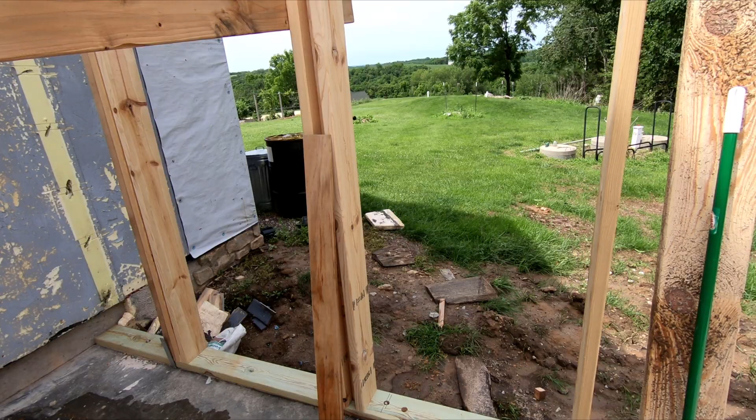Today I'm going to try to get the back wall stood up on our breezeway addition. Whether I can do it or not remains to be seen, but I'm going to give it a shot. It's getting a little late. We had a big storm last night, real high winds and 2.5 inches of rain. So everything is still drying out a little bit.

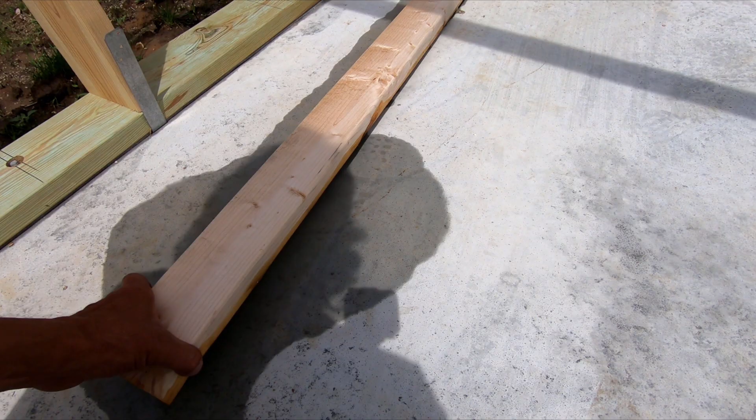So I can't walk out there, that's all clay. And it just sticks to the bottom of your shoes. So I would just make a huge mess if I even step out there for a little bit. I did before, and I had so much mud on my boots that I had to go out and wipe it off on the grass, and just real nasty. So I gotta stay within here, and we'll see if I can get it done.

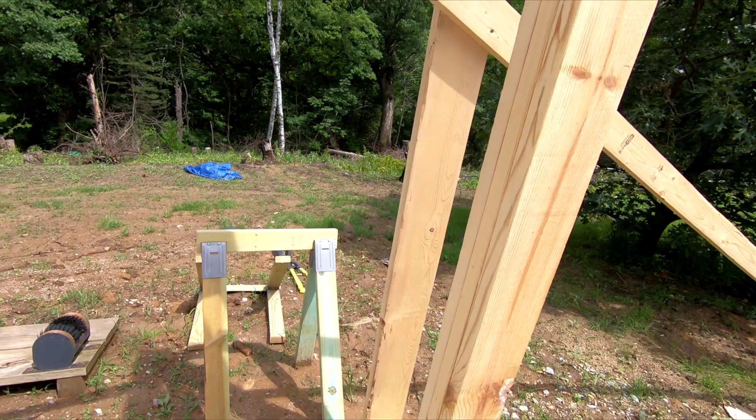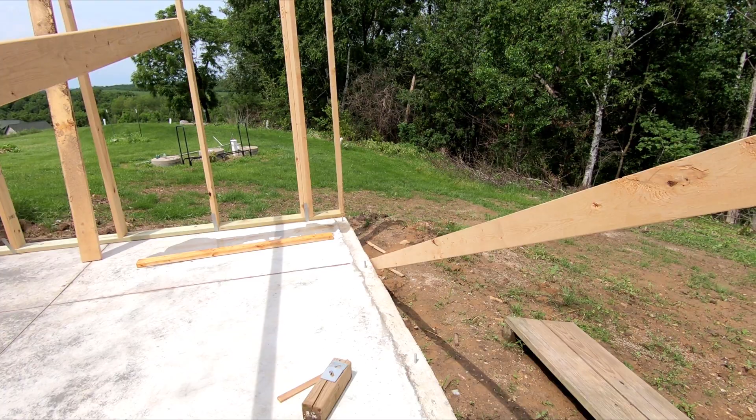The first thing I need to do is get the California corners in, which is just a stud going sideways like this. That's what this will attach to, one on either side. And I measured from the outside here to the outside on there, and it was 3/16 shy of 16 feet, which is pretty damn good. That wall isn't even bolted down, so

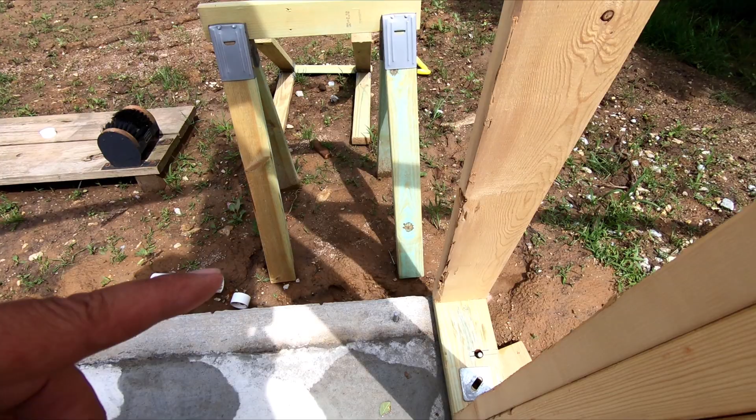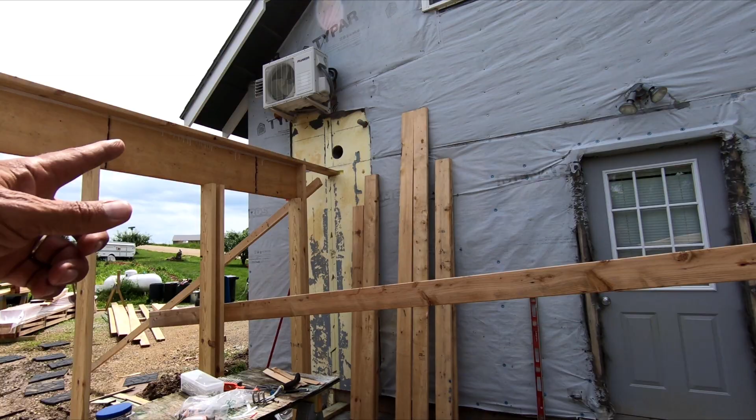I'll have to get the exact width of these boards and figure out my sole plate length and cut the sole plate, cut the top plate, and I believe there is 11 studs here, but I have that all written down across the street in the machine shed where I will need to go right now to get the studs cut.

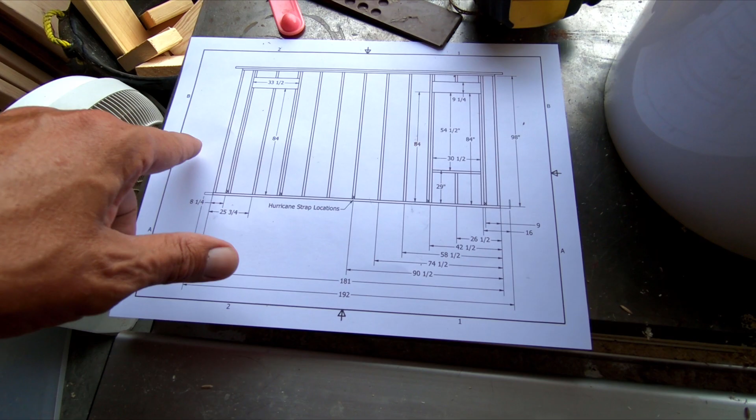Okay, here's my drawing, which I made from the 3D design of the house and the breezeway addition. I should have put a cut list on there, but I'll count them up. I believe there's 11 of them. I got a dozen boards last night. This was not on the order when we ordered our wood. We had a lot of problems with the Menards website. And also, I forgot to add a few things, so just kind of a little catastrophe there.

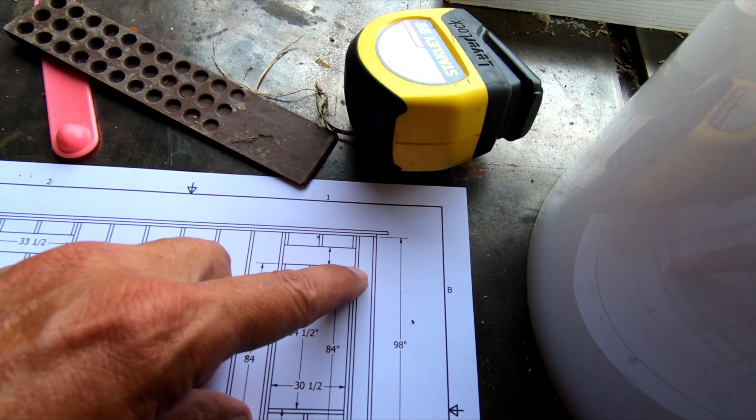When I went there last night to pick this stuff up, it was raining like crazy. I got this and that sheet of 1-inch foam. That's for the inside of these headers. What they are is a header with foam inside, and it's a 2x10, then 2 pieces of foam, and then another 2x10 to fill in the thickness of a 2x6 wall.

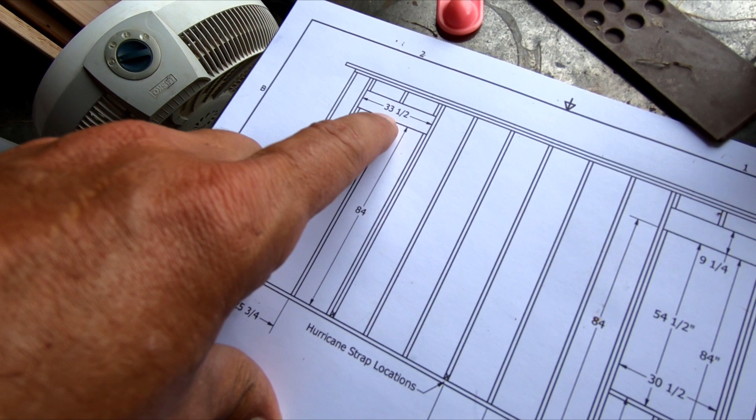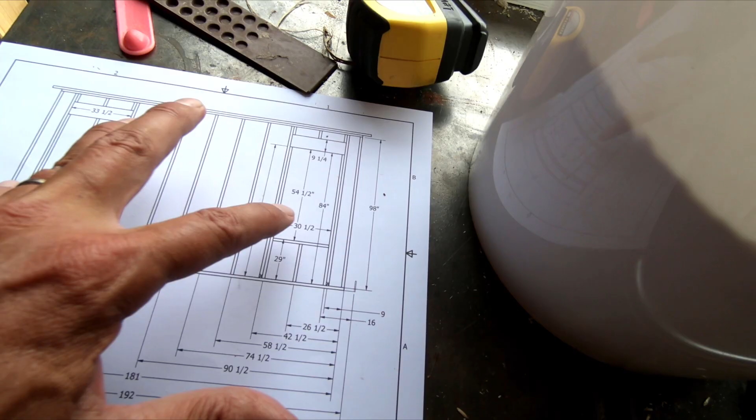So I need to get these all cut to length. Oh, what I was getting at was we don't have these 2x10s either. I could have got them last night while I was in town, and I thought they were here in the pile, and they're not. So I'm going to have to leave these out while I build the wall, which is no big deal. I can put all this filler stuff in tomorrow and just get the wall itself in. So I'm going to get these cut to length, and then I'll go back over there and cut the sole plate and header. I cut them with a circular saw and start assembling.

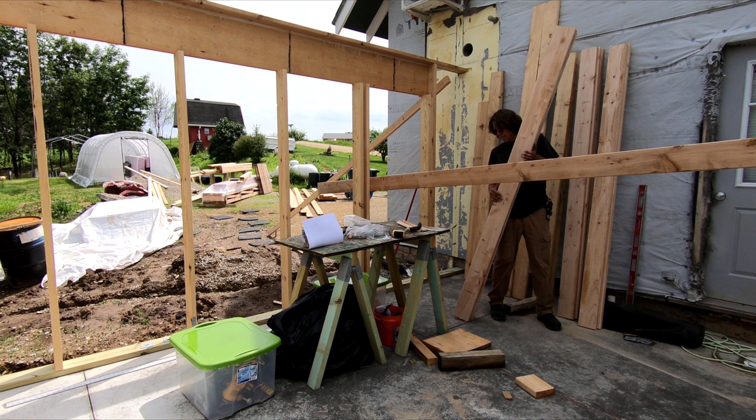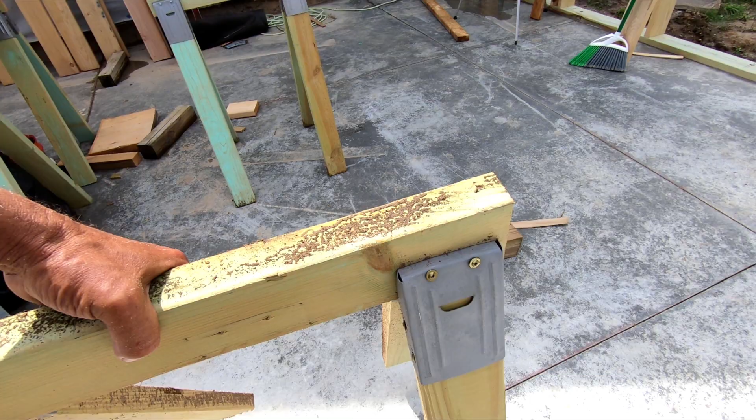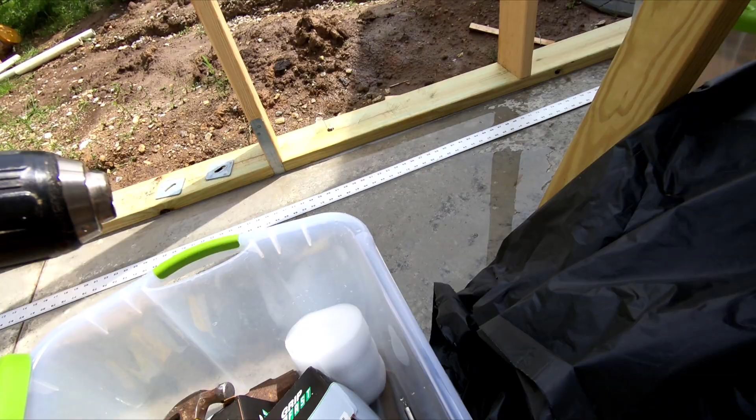...so strong last night that it blew this one way the hell down there. This one flipped out, but it wasn't laying in the mud like that one was. So now I need to get my pocket screw stuff. Pocket screw kit and driver, screw, drill, and driver.

First thing I need to do is pocket screw the California corners and get them screwed into place. Then I will pocket screw all 11 of these. Then I got to lay out the sole plate and the top plate, and I need to loosen up that bolt and adjust this wall a little bit so that it's spaced the right width. Then I can start laying everything out on the floor.

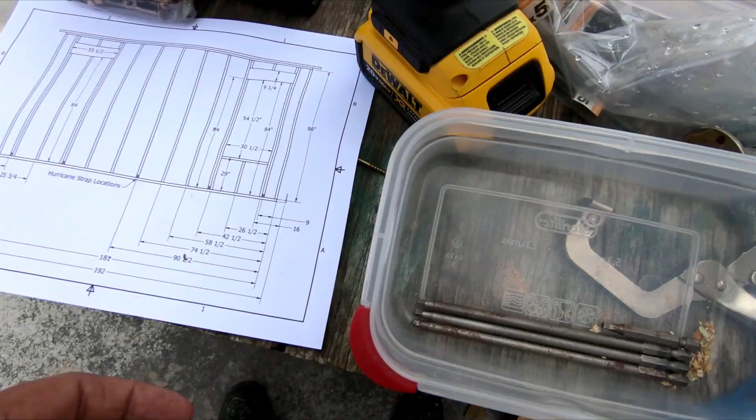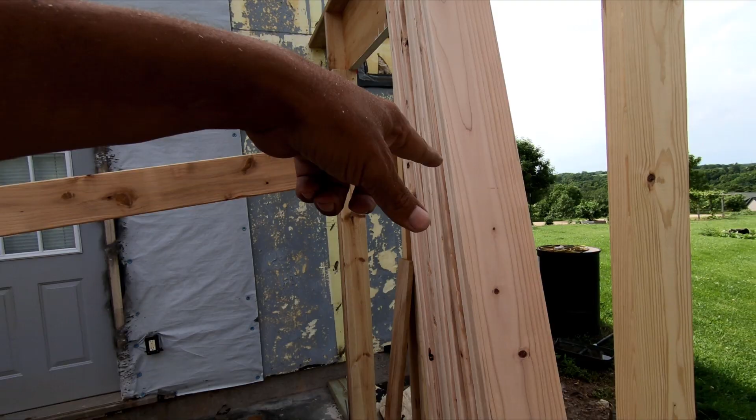So I was drilling the pocket screws on that first board, and then I thought to myself, I don't need any pocket screws on any of the stuff I'm putting in today, except for the bottoms of these California corner ones, which I'll use this one, and I'll do another one for the California corners. Then the rest of these just get screwed right through the top plate and up from the bottom plate, just like a normal wall. The reason these were pocket screwed is because I can't come down from the top plate.

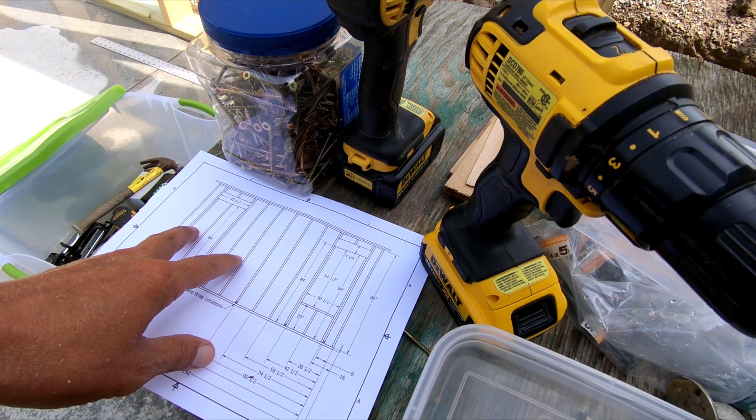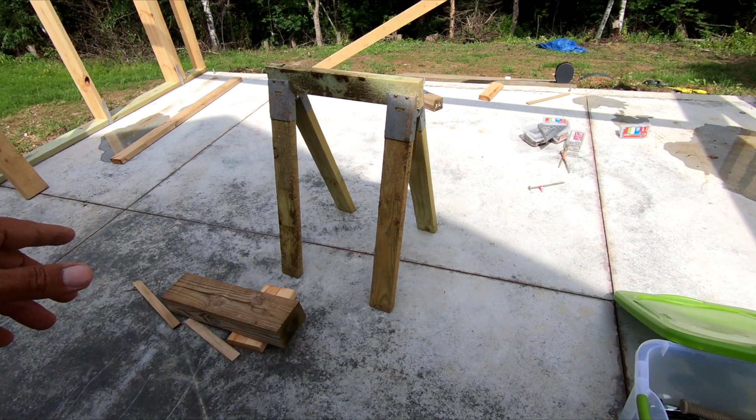I'm into this big header right here. And these also get little hurricane ties at the tops of these as well a little bit later. But that makes things a lot easier. So now I'm going to go get this bottom and top plate, set it on horses, and get that cut. Well, first I'm going to do them corners. Then I'll get that top and bottom plate, get them cut, get them laid out on the horses, and I should be off to the races.

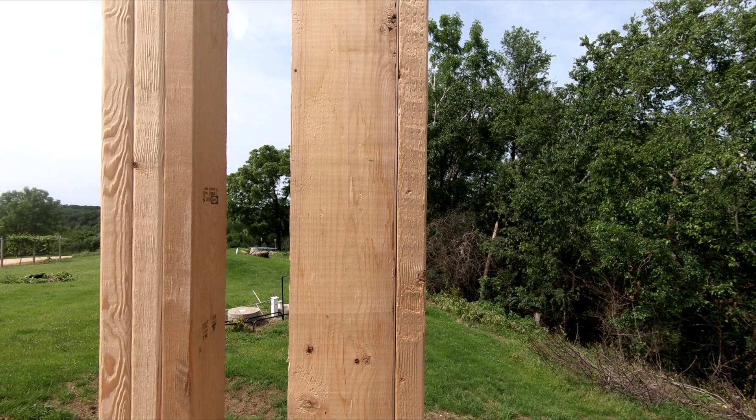All right, now to get the corners together, what I'm doing is yanking them together with the clamp. Get this semi-crappy wood. I go pound that from the other side a little bit. I can't go on the dirt there because it is really greasy. And I don't want to mess it up in here.

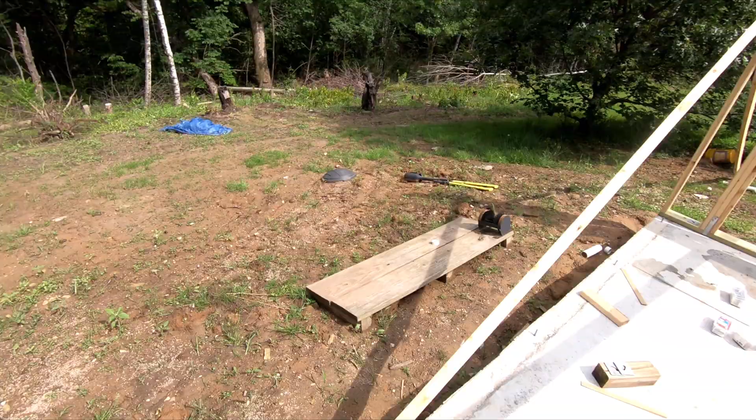Trying to pound left-handed. I'm not real good at it. Okay, now that's nice and flush. So what I'm going to do is fire a screw in there, right where the clamp is. Then move up. Now this one's going to be a good deal easier.

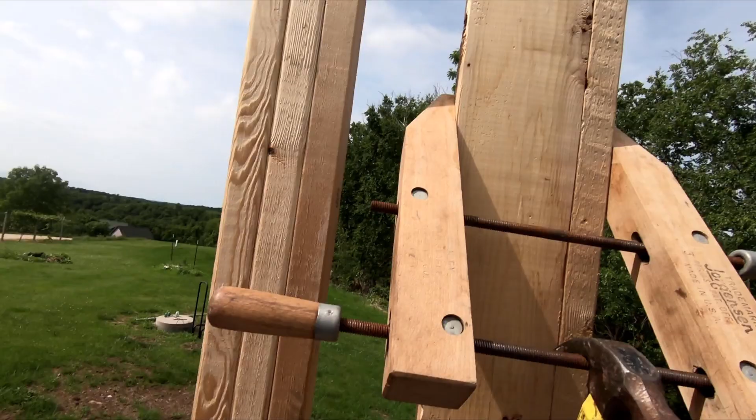Now I got to go get the ladder for that upper one. I already have several screws in there, but I'm going to throw some more in there and then go grab the ladder.

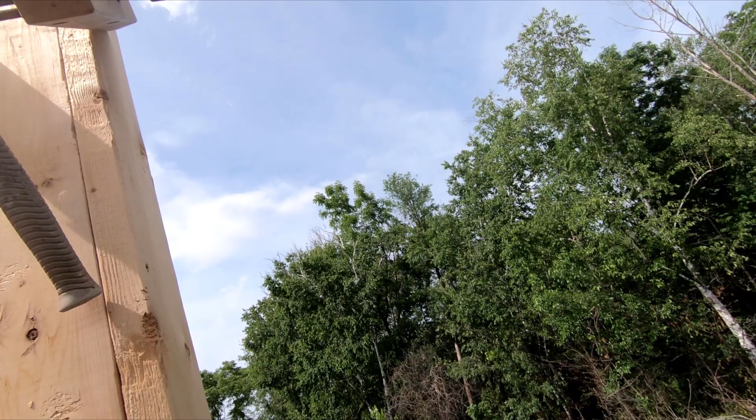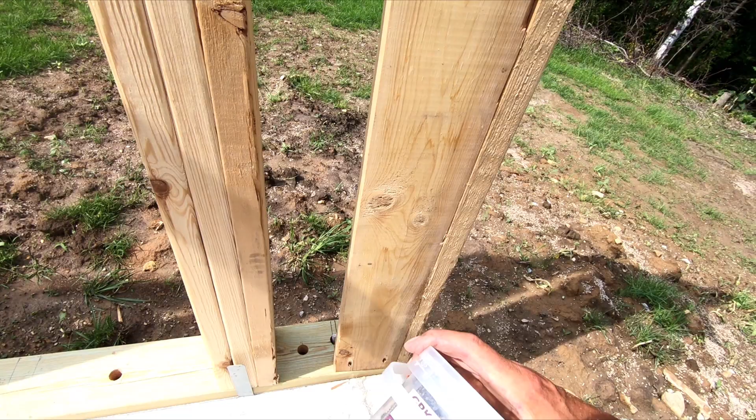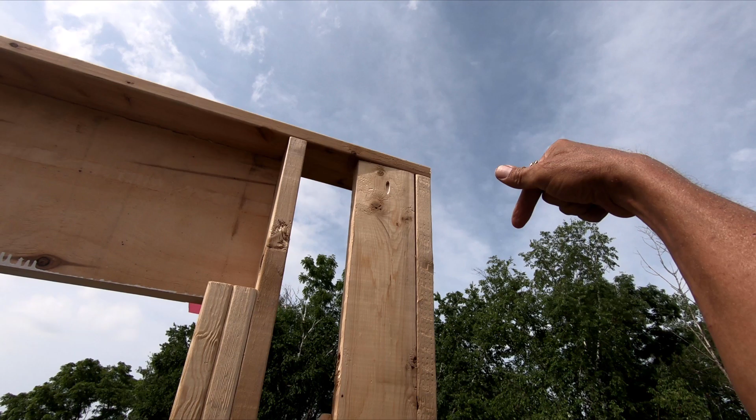That's why I'm using these GRK, the big GRKs. Is that what that is? Yeah, GRK up from the bottom as well, because they're treated lumber approved. Going down from the top, I can use regular construction screws as well. So I'll put like 3 more in from the side and then put a couple down from the top. I'll use a clamp to twist that board straight and then screw it down. I use these clamps for just about everything. Let me go get the ladder.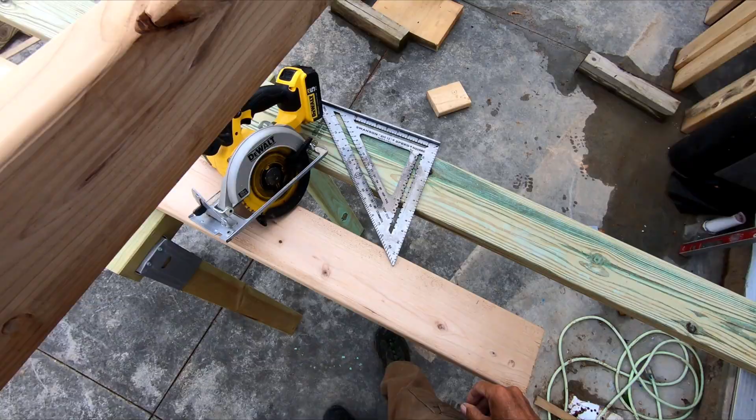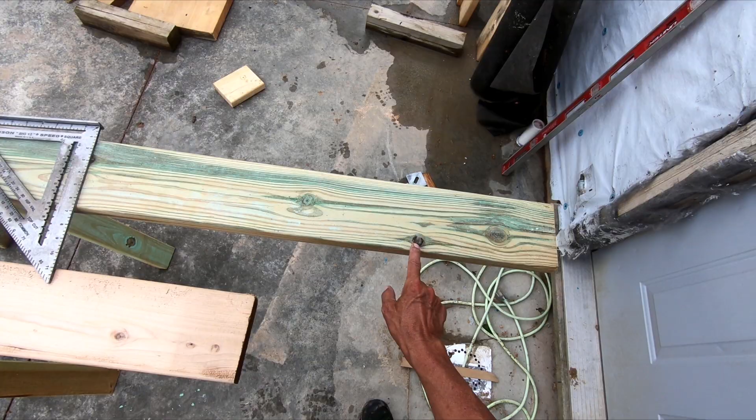Okay, if you've been following along, these are 20-foot boards. I got 3 20-foot sills, and when I got here I picked out the 2 best for the long walls. This is a 16-foot wall, so I got 4 feet that I can play with. It has some checking at the far end, so this crack here and a knot, I'll go right to this side of that stuff.

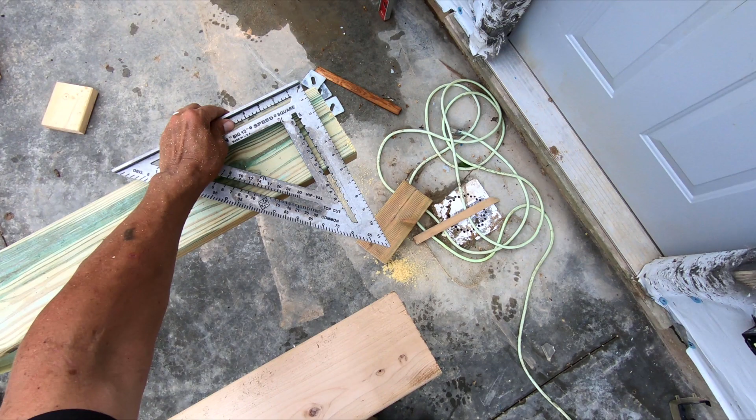Then on this one, it has a nasty crook. It goes like that at the far end. So I'm going to take this one off as close to the end as I can. I'll go right here. Now, they need to be cut off at 181 inches. Okay.

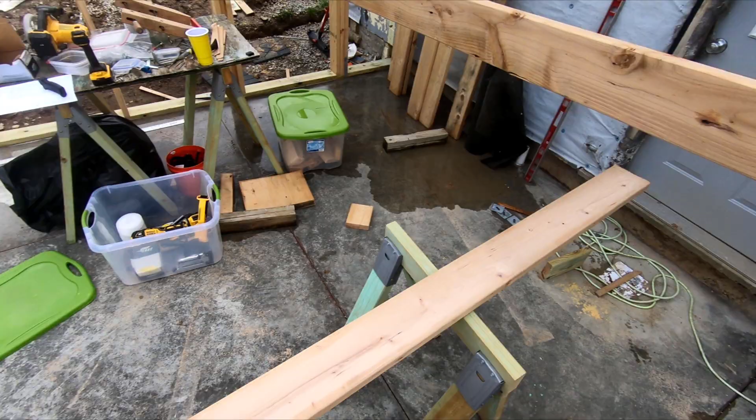Don't know if I'll be able to do this or not. Nope. I'll have to use my other square. This one's too big. This is really a pain in the butt, ducking around these cross braces to get around. Soon they'll be gone.

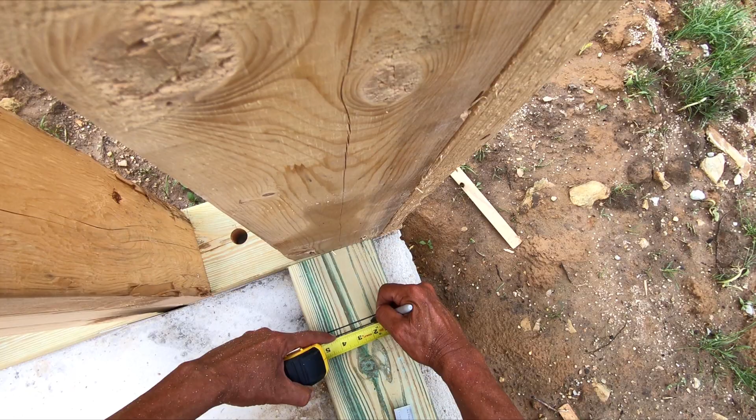Okay, so all I'm doing here is marking the actual location of the studs, like thus. Oh, gee. Now I measure from the outside here, which I'm going to call 1.5, so I'll go 1 3/4, and that will be the center of where I drill for this. So I just got to work my way. Oh, it is so hot and humid out here. It's just insane.

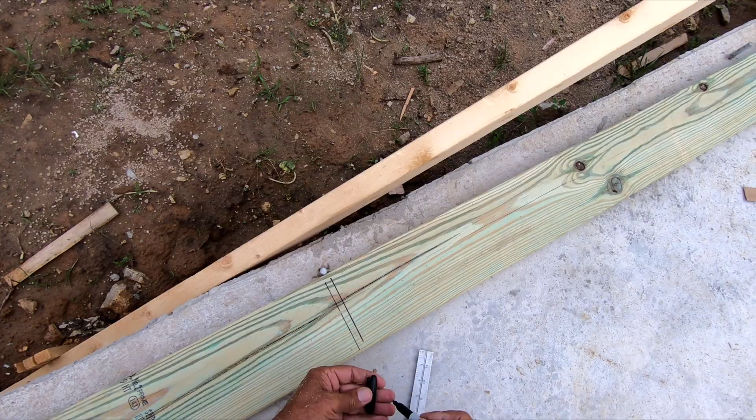So again, go from outside of the stud, make 2 lines, and then this is in the way, but I think I can get it. Got 1 3/4, so we're going to go 2 inches in, and that will be the center. Okay, just a couple more to do, and then I'll put it up on the horses and drill these holes. Then I got to lay out the studs and lay out where the actual anchor bolts will be drilled in, like on these. Alright, let me get this done.

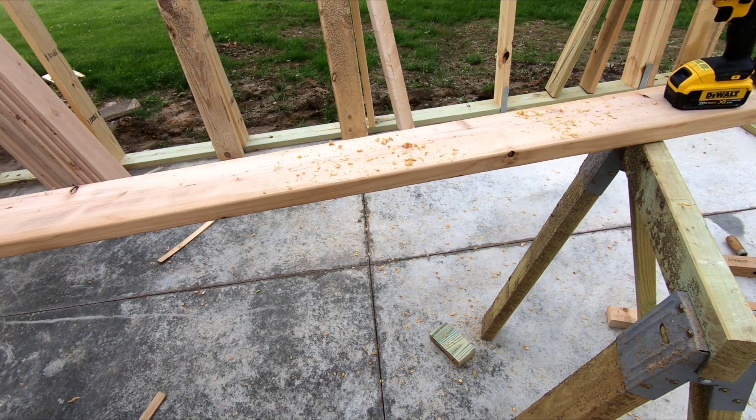Okay, the sill plate fits real well. Now I need to pop it out of there, which is not so easy. Get it up on the horses and most likely have to clamp these 2 boards together. Do all the layout, and that's where I'm going to end it today. It's getting pretty late and I got to jump in the shower and head to town to get the boards that I need. So let me get this up here, get it laid out, and then I'm out of here.

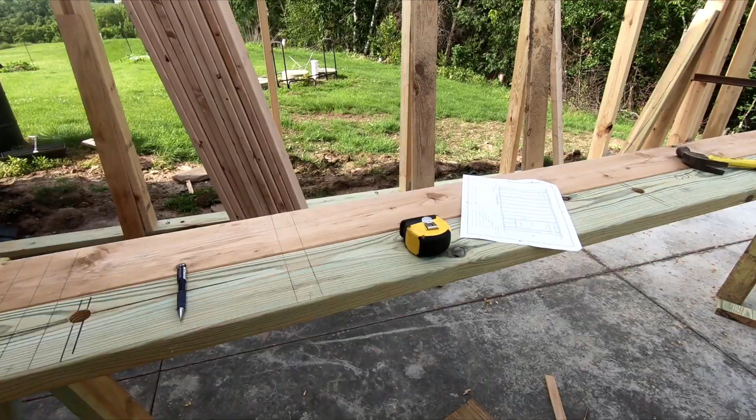Okay, that's going to have to do it. Got everything laid out, all ready to go. I'm hoping this dries out a little bit overnight so I can be out there in what is now mud to screw those lags through the bottom of the sole plate into the studs like I did with the other walls. It's going to be nasty trying to do it from inside here. I will if I have to, but I would rather not.